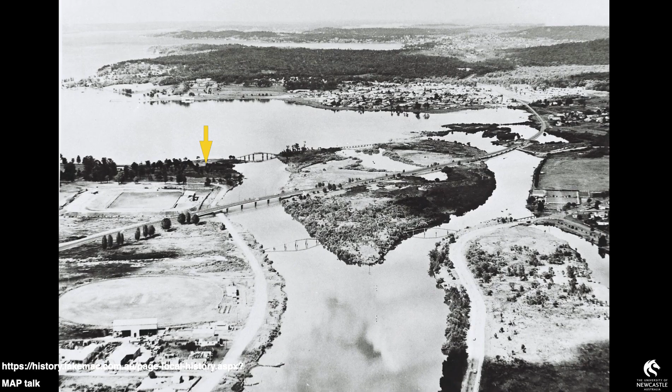A few historical shots. This is the site I've just been identifying. This is Nine Islands Bridge - is it nine or seven? But that's the main road that still exists. There was a pedestrian bridge that connected the site to this remnant mangrove. So it's just kind of interesting. Back through history, this is the site, and there was a little building there. It's just interesting to trace it back.

Cockle Creek itself would have been amazingly beautiful. You can imagine what this would have looked like in colour. Just amazing. But of course what happened was that further up Cockle Creek, they built a sulphide works, and it wasn't long before that's what Cockle Creek looked like. And what's all that white stuff? That's dead fish - the pollutants out of that sulphide works were pumped into Cockle Creek. So what you see in Cockle Creek at the moment is really a remnant of what it was, I suppose.

The other thing in passing - I could speak at length about this - is this book on the left-hand side, written in 1827, Specimens of a Dialect of the Aborigines of New South Wales, being the first attempt to form their speech into a written language. Where did that occur? They're talking about the Australian Aborigines - in Lake Macquarie, Awabba, the Awabakal. So this is an Awabakal dictionary. And on the right-hand side, Threlkeld, 1892, is the actual dictionary, which is fantastic. It's an amazing document, and you can still get it - I've worked with that.

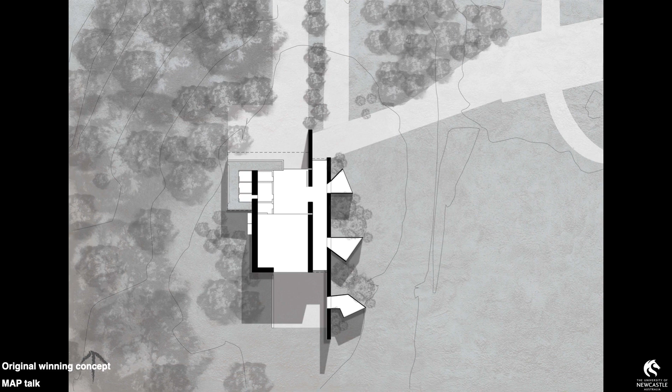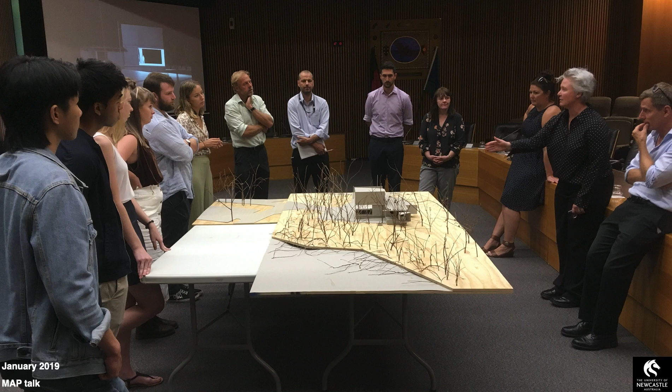Sammy's drawing is very beautiful. But as soon as we had that meeting, the first thing that came out of it was that there's a 1.4 metre floodplain over it, and your building has to lift 1.5 metres up. So we went from a building that was basically sitting on the ground, where you could just walk up into it, into something that was now 1.5 metres up off the ground.

That must have been super frustrating that it wasn't in the brief. Well, it's because it hadn't been tested at the DA level.

Then there was a whole dialogue about, hey, we shouldn't be creating a refuge in the middle of the park because people might actually run to it if there's a flood. And they didn't really take that.

Then the thing that was sort of a bit of a sealer - Tony Farrell, who was a very clear kind of thinker, said, look, we ask people all through this locality to lift their buildings for flood, so we're not going to avoid it for ourselves. And we went,

fair enough. So that's what we did, but that then started this process, and there's a few of the students here, which is great to see, who were part of this process of lifting the building up. And essentially, as soon as you lift it up, you can't really ignore the promenade because you're actually creating a plinth, and so it sort of forced us in some ways to take on the promenade.

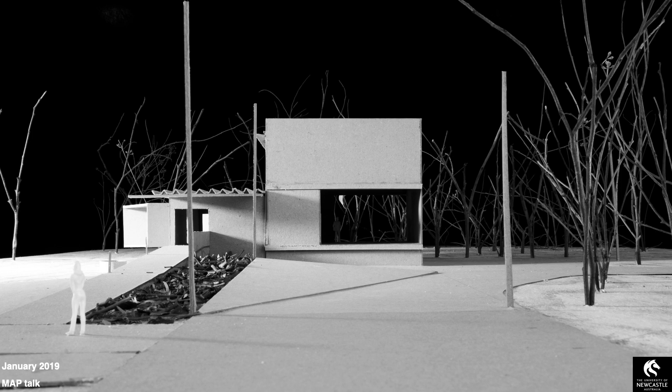So these are just photographs of the model. This is a 1:50 model, and I think everything here was made out of scraps in the studio. I have a policy that, you know, we just did this gyoza kitchen and barely bought anything. Seamus would have to answer that, but you can just use stuff around the studio, and this model was essentially made out of leftover stuff.

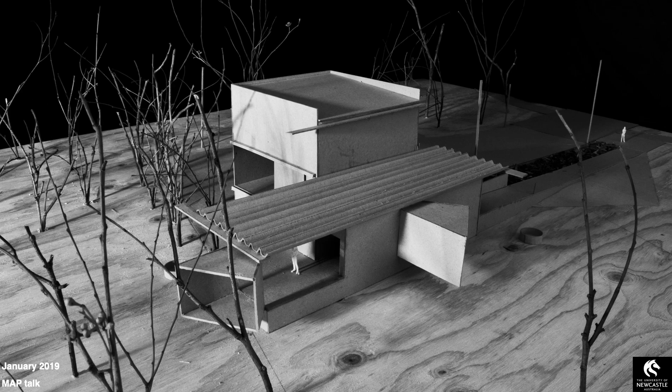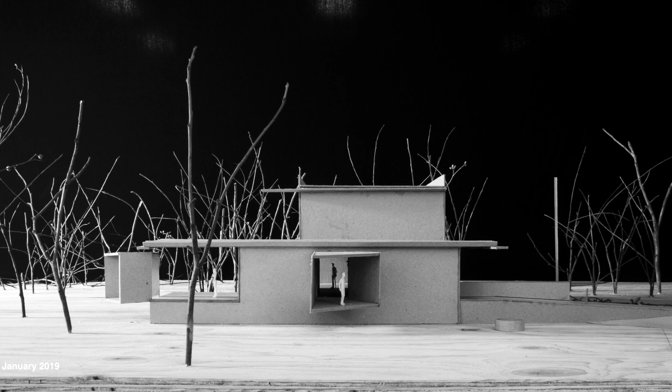The other thing was that the budget for the building was 2.1 million, and we had to lift it up 1.5 metres, and they said no, the budget's still the same. So the building ended up having to be squeezed, and we were trying to look at different ways. It was meant to be concrete walls and things, but that wasn't really going to work at a cost level - there's no way, it was going to blow it out of the water.

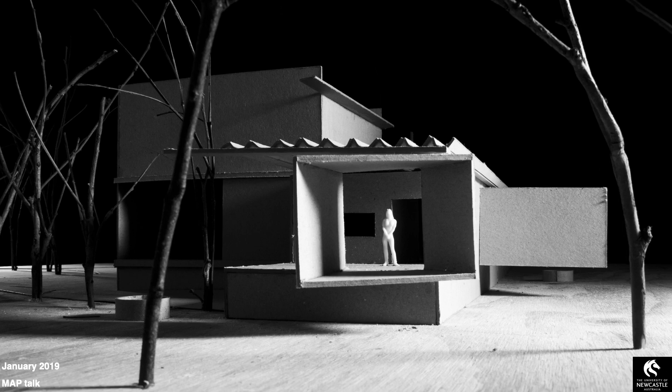So it ended up starting to talk about brick, and that created problems because people had looked at brick buildings, and brick buildings were suburban buildings, and this wasn't suburban. So there was a whole battle, and in fact it went on for months about that. But I'll touch on that.

These are just models of photos of the model, and the date here is January 2019 - the dates are important because we're now a year and a half after this point. The plan that came out of this, I think this is Charlie's plan - does beautiful plans - the plan of the building in January 2019 hasn't changed a whole lot from that point.

There's the promenade, there was this landscaped area, there was this multi-art space with the two doors, this was the ramp. You walk in, there were some services, a kitchen, served tea and coffee and champagne and so on. There was a deck out the back, and there was this exhibition window, as we called it, this sort of viewing window. And then this is the big space, 10 metres by 10 metres by 7 metres high - in fact it's 10 metres high on the outside.

And now these are - it's out to tender at the moment. So the building price, just to jump ahead, we're talking today almost - it's doing RFIs and whatever for tender, but the building cost is around 4 million now. So it's moved from 2.1 to about 4, and there's a whole process there that went through.

But the big part was that it started to engage with the landscape, started to get a little bit more serious, and the big thing was that it has generated its own political will. So Kay, the Lord Mayor, is a big supporter. Other councillors too - we've made presentations to councillors and they just love it. This whole idea of this building and students, bringing this new culture to Lake Macquarie, something it doesn't have, is so important to them.

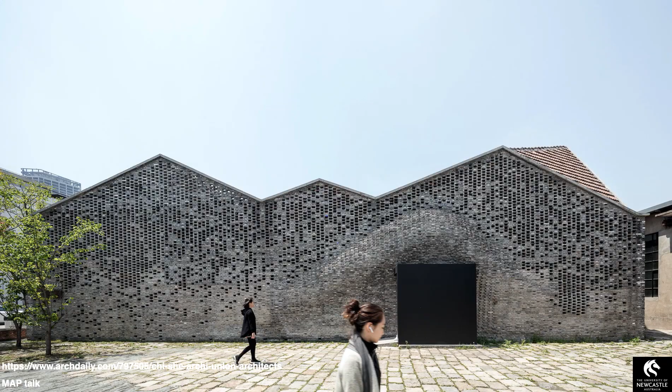Anyway, I saw this building, and it's a very beautiful building in China. I haven't been to it, just seen the photo, but it's essentially a concrete block building, and the brickwork is acting as a screen, I suppose.

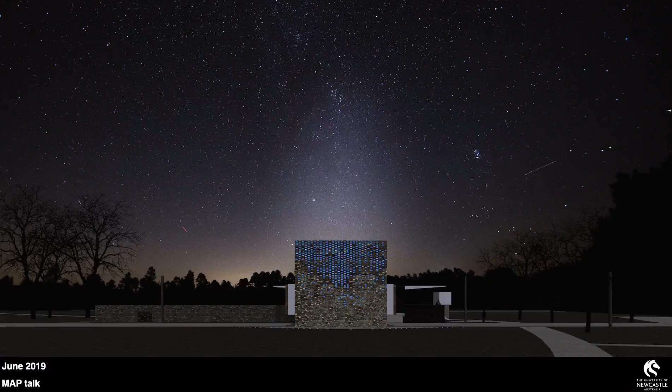And I thought, okay, so this is something that we could do, is that we could take the building in and we could put light behind it and it could glow, and so that would be your sparkle. I did this image thinking, oh, they will just go for this, and completely did not go for it. Not that they attacked it, but they just ignored it. And they still ignore it.

And it came back, there's no way that we can have holes in the building. I wasn't saying that we'd have holes. If you're into detailing, what's happening here is that a masonry veneer wall is a wet wall. It's always wet, you've got to imagine it's always wet, so there's always a cavity. And so what I was thinking was we put a wet wall that's got holes in it.

So what? And then on the inside of that, we then put fibre cement. So it's actually a fibre cement building with a concrete wall in front. And of course, there were lots of little places where water could rest, and that was sort of like, oh yeah, we can get the water resting in there. What are they going to do? It's 10 metres high, and whatever.

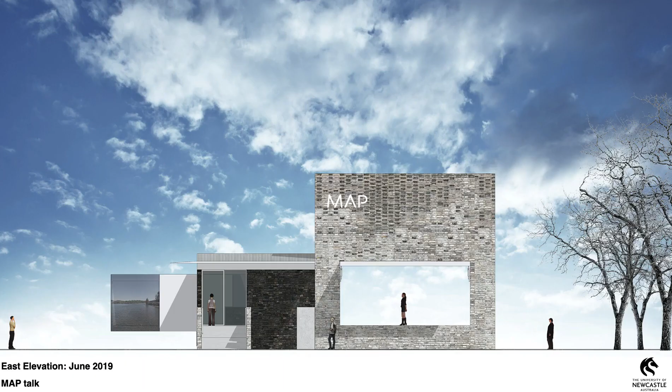So this kind of ageing process was something that, I didn't show them this, but something that is still within the building. And I love this slide here, the post-industrial garden studio. If you start thinking about algae and lichens as being a garden on the building, it tells you there's a history here, that it's letting you know about something, and maybe we need eyes to kind of see that sort of stuff.

So this is what went forward for DA. These are the drawings for DA, and you can still see I've actually used the patterning, or we have used the patterning for this wall from that other building, and it's sort of dark here and it's light there.

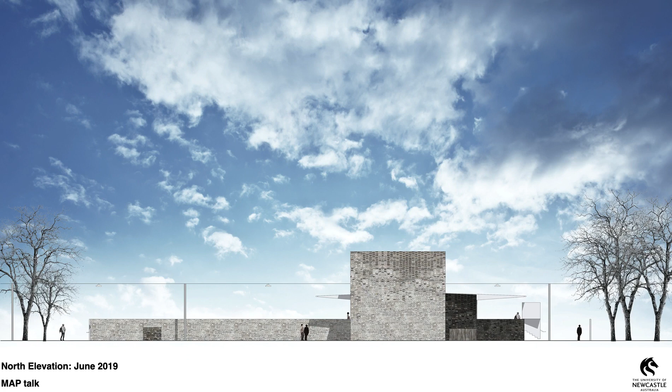And then there's a whole big thing about these hydraulic doors that we didn't want, but we ended up with that. So you've got to sort of, oh yeah, we'll do the hydraulic door thing, but let's go with the brick sort of thing. And so this is the north elevation, and that big north elevation could be used as something you can project onto or something like that.

Again, just get your bearings. That is 10 metres high. Like if that's big when you see that. So this is quite a large thing, and this is the ramp.

But it then has, at this stage, at DA stage, it had two masonry walls on each side. As it turned out, the CPTED, which is for crime prevention, didn't like this. And that was because, I suppose reasonable, that you could walk down here and you could get to the end and someone might be hiding at the end, like around the wall. So when you're outside, CPTED is all about making sure that you can see what's around you and that you don't feel like you're in danger.

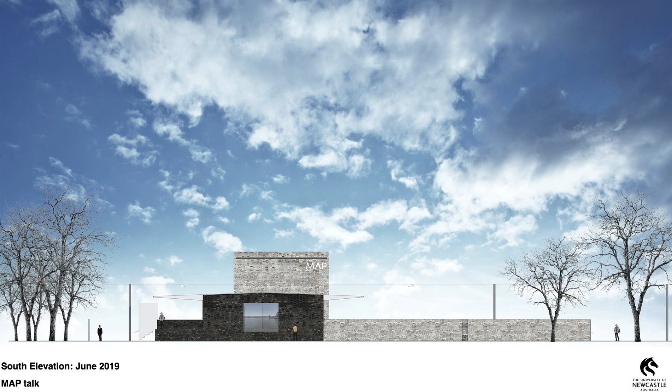So that's the north elevation, and then this is the south elevation, and so there's that window, that sort of funny shaped window. Here's the foyer, and then there's the box sitting at the other side. And that's kind of its general arrangement, essentially. It's promenade, this big box sitting at the end, and the box is the same width as the promenade, so it actually sort of rises literally within a few centimetres. It is the same width.

And this kind of window has become stairs. There's the deck, there's the window, and to get past the CPTED, the masonry walls disappeared, and we end up with a 50mm stainless steel tube, and everything is 304 stainless.

If you know your stainless steels, it's cheaper, but it also goes golden. So everything is a mill finish. It's all stainless steel, and it's welded, but it's what I call maker's mark, so there's no grinding back of any of the welds or anything like that.

It's simply welded and left. And it's funny because at the moment the tenderers are all coming back and saying, normally this is polished, normally this is ground back, and the council keeps coming back and saying no, it's a mill finish, and so they're adding 10%. Well, hopefully they're deducting 10% - I mean, good, because you're not grinding back and polishing.

I think stainless steel - and I know Warren has done some projects in our practice as well, where if you just weld it and the welders say, okay, it's done, and it's still got their waxy chalk marks on it and things like that, they're sort of okay with that, because that's what happens if they're doing something for a train or a piece of industrial equipment.

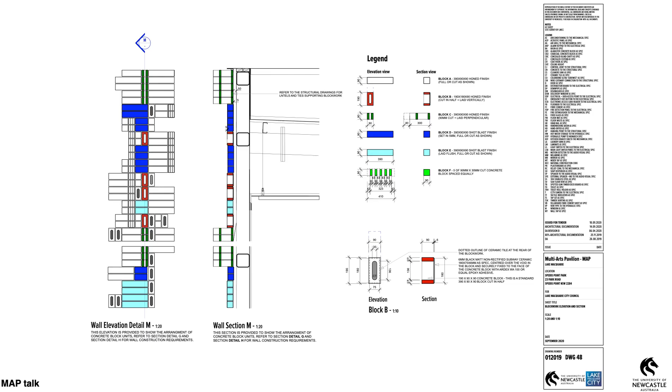So, yeah, I think history is really interesting, and the future is also a place that we can start to occupy. Sorry for all of that.

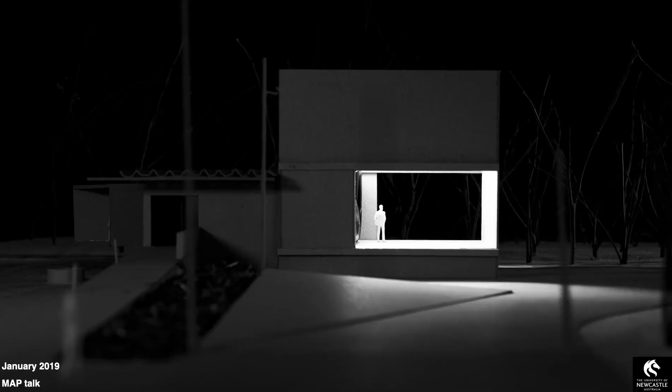Okay, so Chris, when do we lose capitalism in your thing? Just can you... 3rd of November.

Well, I think, as I said, you can speculate about those things, but I don't know, it's just an interesting thing. Will it continue like this? Certainly for the last 50 or 100 years we've been pretty static. I know we've had a few world wars, but things have been quite stable, so I don't think we've really felt things being unstable, yet, in my lifetime or yours.

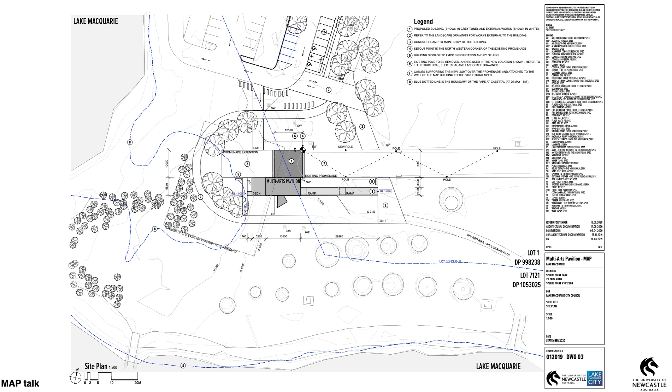Yeah, no, I really agree about that. Props on that. So good, sick.